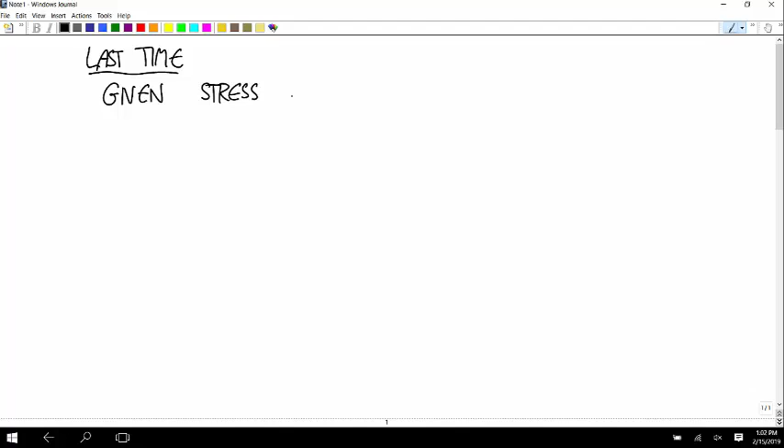Okay, so last time, here's what we talked about. Given a stress tensor, the eigenvalues of sigma are the three principal stresses.

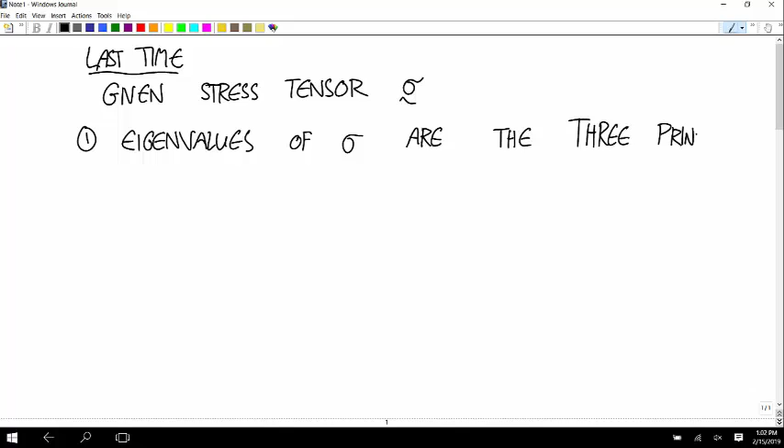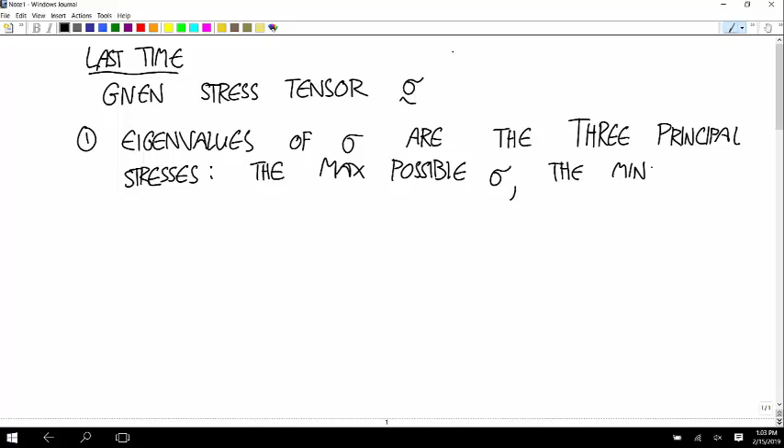That's the maximum possible normal stress, the minimum possible normal stress. And when I say possible, what am I talking about? This is all sort of confusing. It takes a while to wrap your head around it all, I think. So when I say maximum possible, minimum possible, what am I talking about?

I'm talking about at that single point, you can rotate the coordinate system all these different ways, and some coordinate systems would give you big values, some would give you small values, but you'd never find a coordinate system that gave you a more positive value than one of them, and you'd never find one that gave you a more negative value than the other one. So that's what I mean by possible. You can look forever at that point with all these different coordinate systems, and you'll never beat those. And then there's one in between.

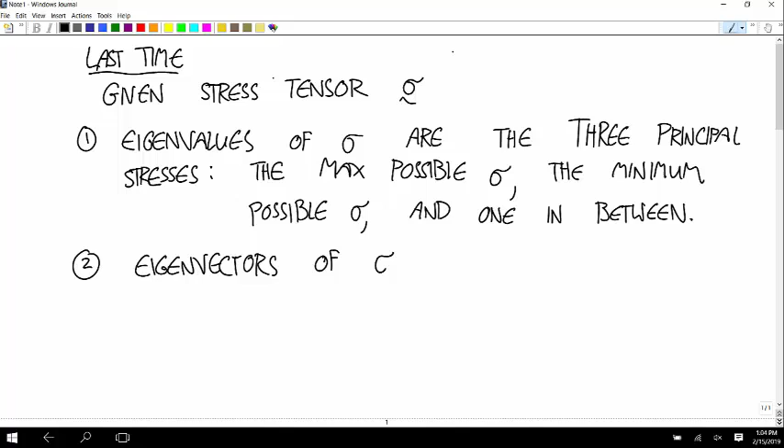The eigenvectors, it takes a little fiddling to get them, but they give you directions of the coordinate axes in the principal coordinate system. So these are the axes of the principal coordinate system.

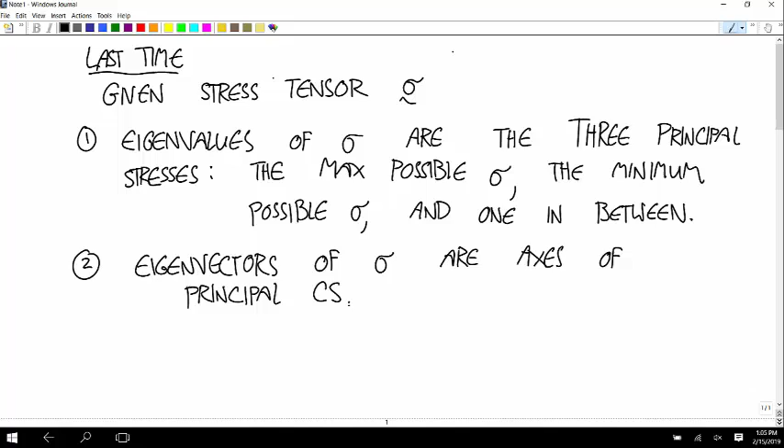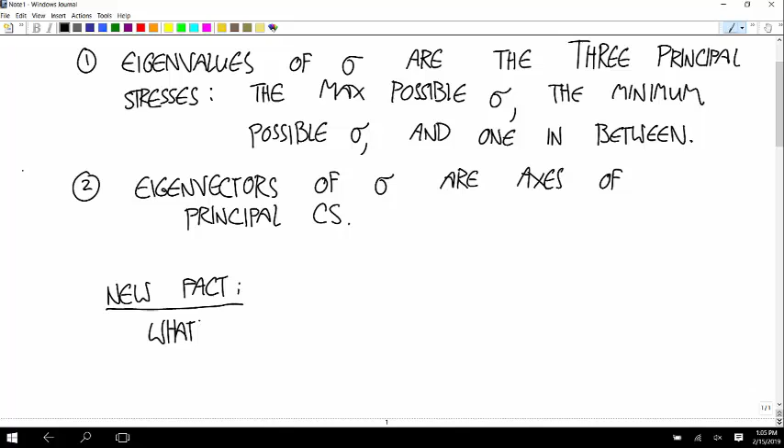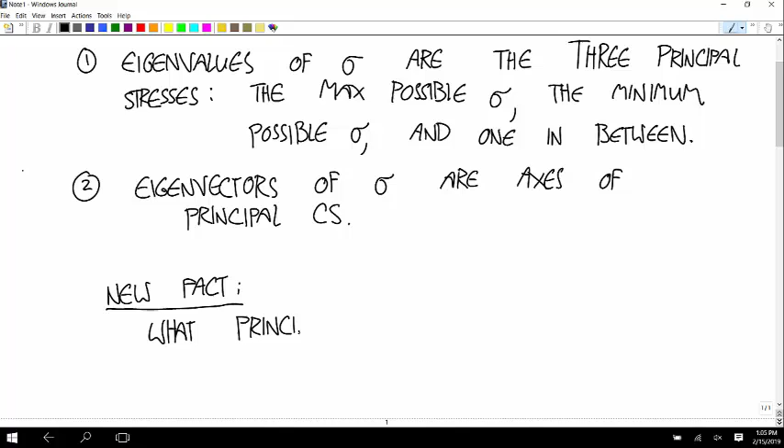And now here's the new thing. It turns out that it's not really the maximum and minimum normal stresses that we're looking for most of the time. What we really want, what the eigenvalues or the principal stresses are most useful for,

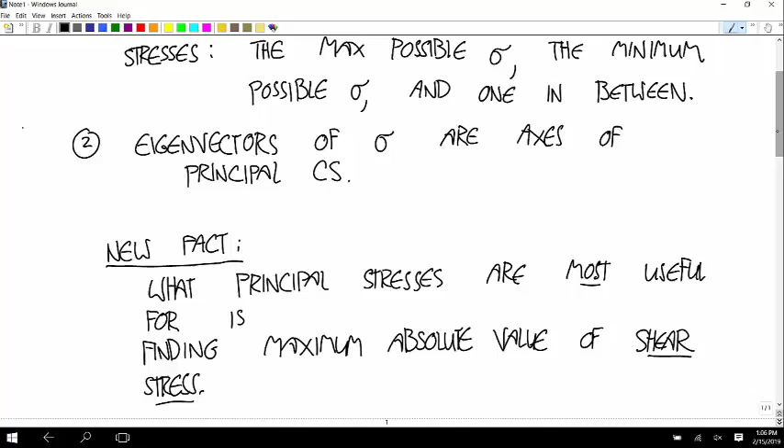is finding the maximum absolute value of the shear stress. So you take the eigenvalues, they give you these maximum and minimum normal stresses, but that's not really what we're looking for most of the time, especially with brittle materials. The more brittle the material, the more important this is. What we're looking for is the maximum absolute value of shear stress.

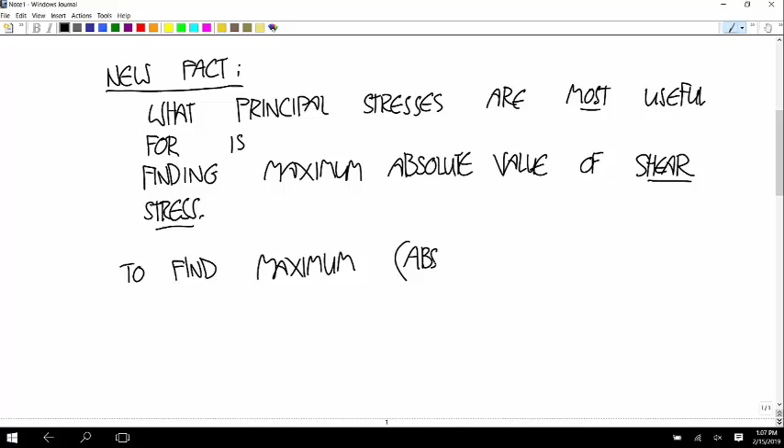Again, at that point, you can rotate the coordinate system all these different ways. And when you find a coordinate system with the maximum absolute value of shear stress, that maximum absolute value of shear stress is a good predictor of damage or failure. Okay, so how do you do that? To find the maximum, people just call it the maximum shear stress, but remember we're talking about absolute value. With shear stress, there's not really any fundamental difference between positive and negative.

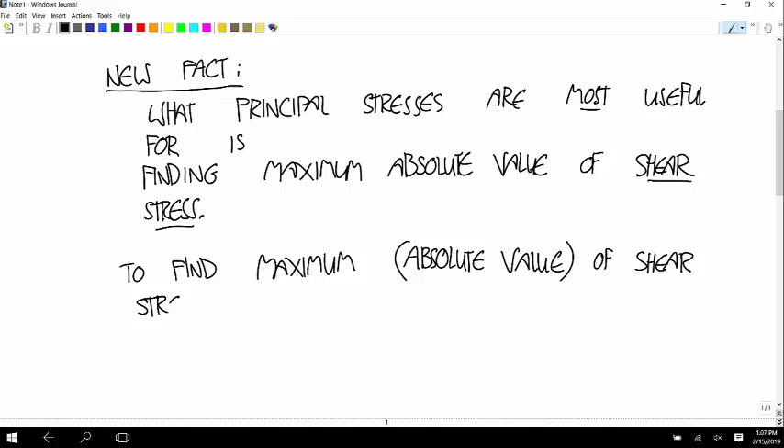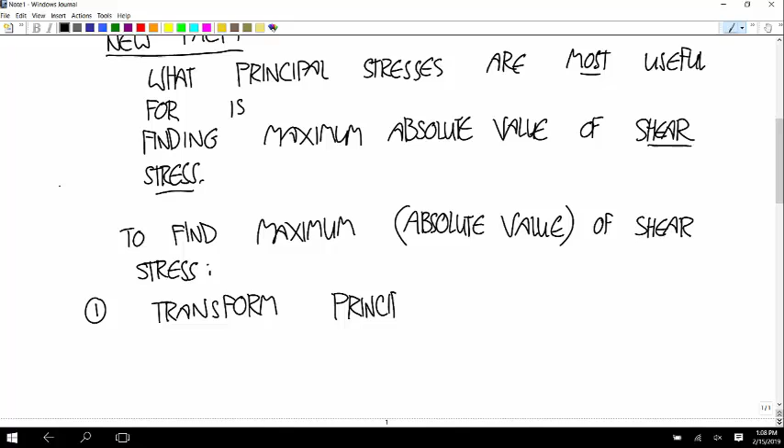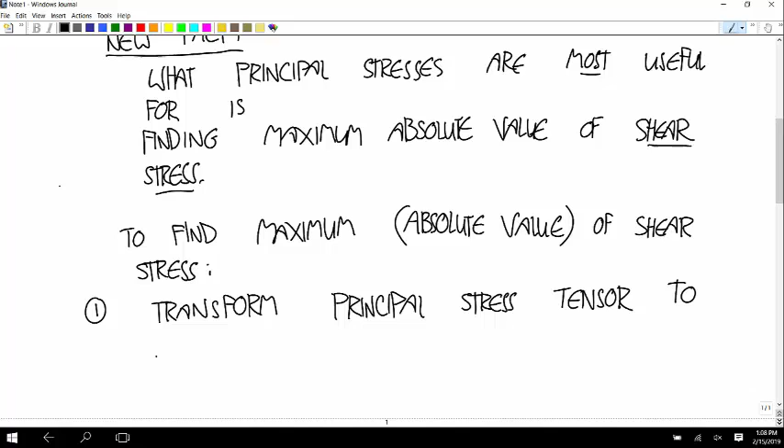So one thing you can do is a rotation: transform the principal stress tensor to a coordinate system that's rotated 45 degrees about the axis of the middle eigenvalue. Okay, that sounds sort of wordy, but the idea is simple.

When you have your principal stress tensor, you have three values on the diagonal. The x diagonal position is the x normal stress. The y diagonal position is the y normal stress, and the z normal stress is the third one. Whichever one of those three is the middle value of stress, rotate about that corresponding axis. So if your middle one is in the x position, rotate 45 degrees about the x-axis. And you get this new stress tensor that has a maximum shear stress when you take its absolute value. That's the hard way to do it. It's not that hard, but there's an easier way.

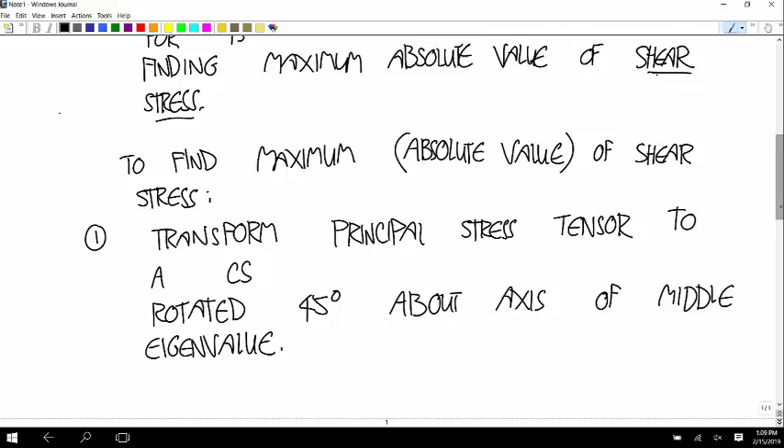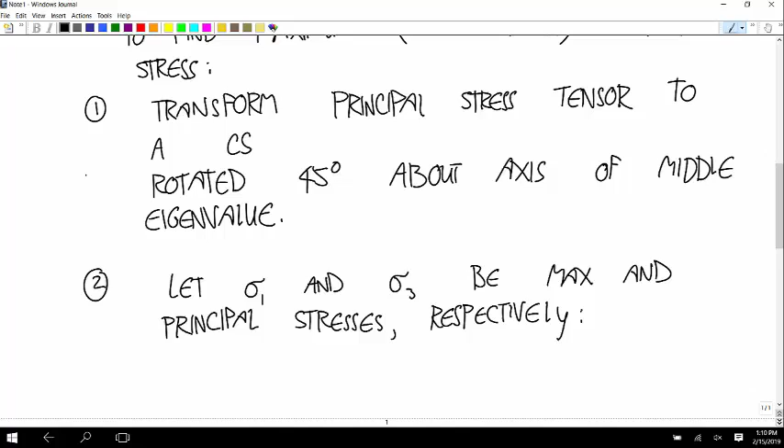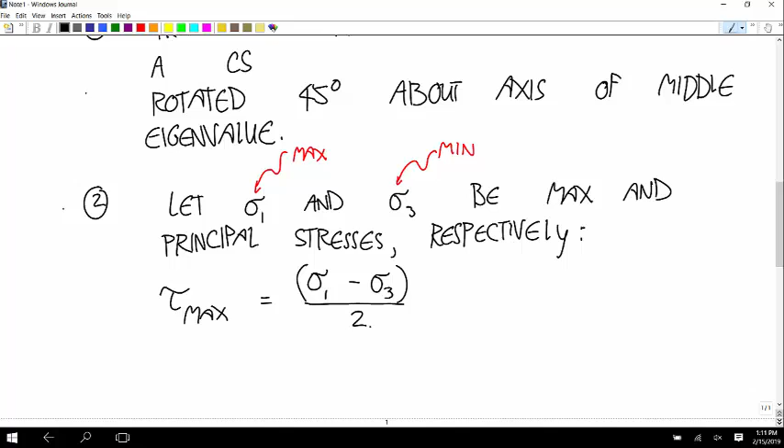The benefit of that is it'll give you the whole stress tensor. If all you want is that maximum shear stress, then let sigma 1 and sigma 3 be the max and min principal stresses, respectively. So this one's the most positive, this one's the least positive or most negative. Then the maximum shear stress is the maximum principal stress minus the minimum principal stress, divided by 2. So if all you want is that maximum shear stress value, you can just use that simple formula and calculate it, and you don't have to worry about any of the other elements in that matrix.

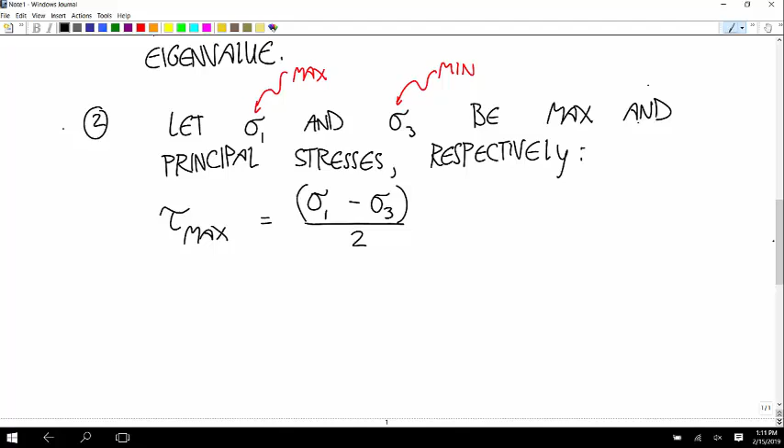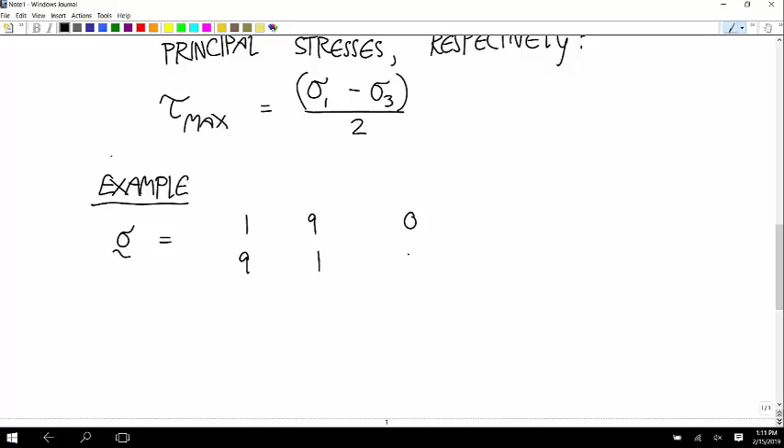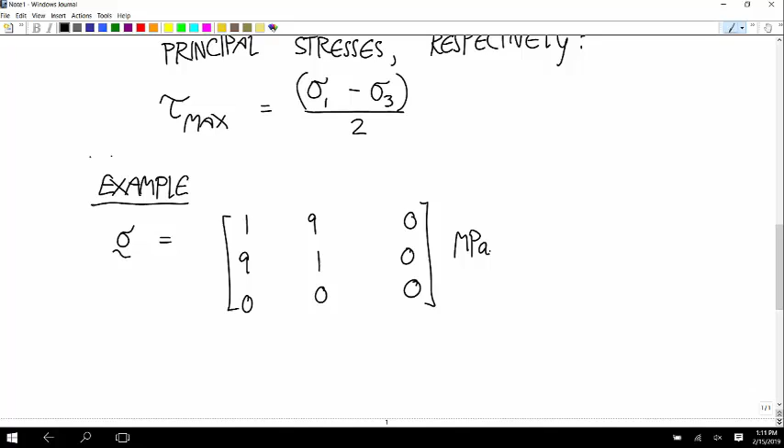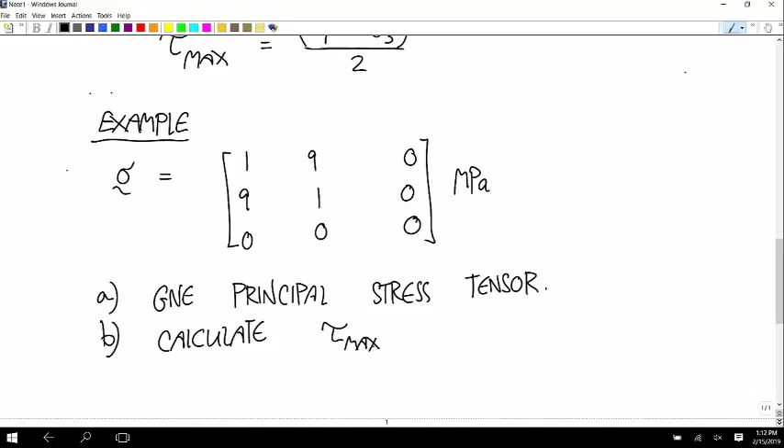Okay, let's do an example. Let's say the stress tensor is [1 9 0; 9 1 0; 0 0 0] megapascals. A: give the principal stress tensor. B: calculate the maximum shear stress, just using that formula. And C: last, we'll do that coordinate system transformation.

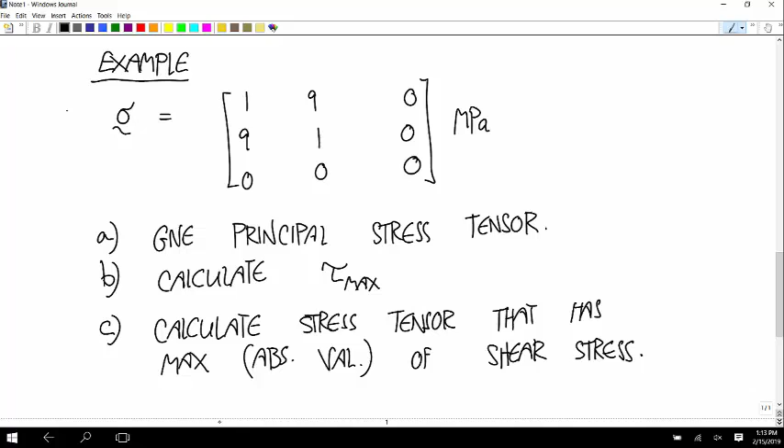We'll calculate a stress tensor that has the maximum absolute value of shear stress. And B and C have to agree. When we take the biggest absolute value out of this stress tensor, it has to match our answer for B that we get from that formula. Or else I'm a liar. Or we made a mistake.

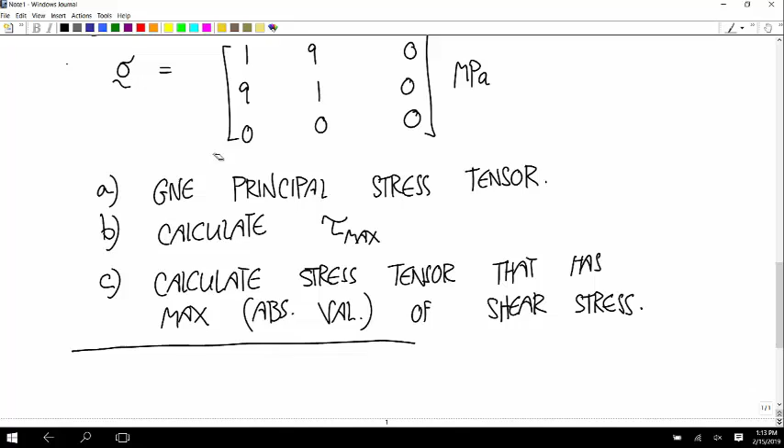Okay, so the easiest way to calculate the principal stresses is just to plug it into a calculator. But I have this set up to just turn into a quadratic. So let's go through the calculation. For A, just make your calculator do it.

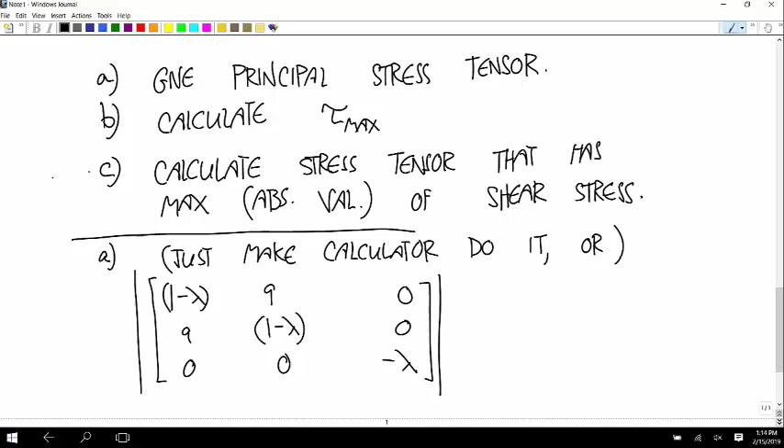So now we're going to take the matrix with rows: 1 minus lambda, 9, 0; then 9, 1 minus lambda, 0; then 0, 0, minus lambda. And we want to set that determinant equal to 0. So we have 1 minus lambda times the quantity, 1 minus lambda times negative lambda, minus 0. Then we have 9 times the quantity, negative 9 lambda minus 0. And then we have plus 0 is equal to 0.

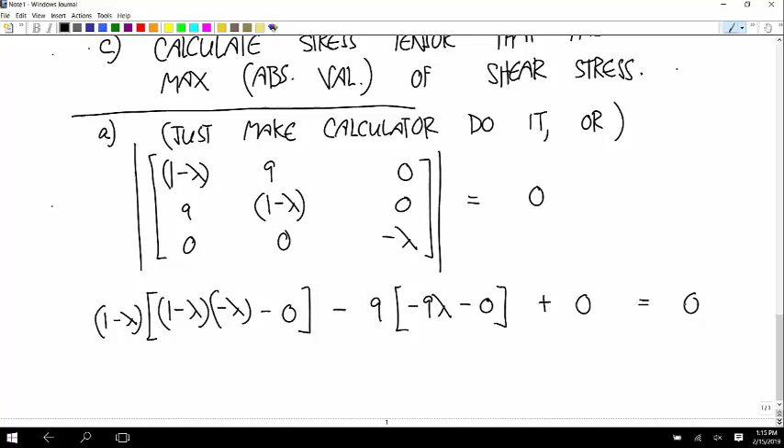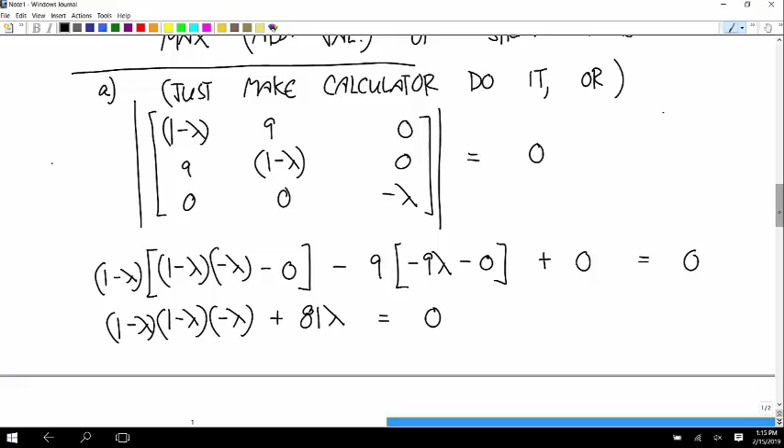And if we multiply this out, we have (1 minus lambda) times (1 minus lambda) times negative lambda, plus 81 lambda is equal to 0. So let's pull a lambda out of everything, and let's switch the signs. So we have lambda times (1 minus lambda) times (1 minus lambda) minus 81 is equal to 0.

And you can already see, since we've factored out this lambda, one of the roots is lambda equal to 0. I multiplied both sides by negative 1. Okay, so lambda equals 0 is a root. So now we just need the other two.

And 1 minus 2 lambda plus lambda squared minus 81 is equal to 0. So we have lambda squared minus 2 lambda minus 80 is equal to 0. And now you can just use whatever quadratic formula solver you have. This factors into nice numbers, but just use the quadratic formula. It factors into (lambda minus 10)(lambda plus 8), I believe. Lambda is equal to positive 10, negative 8.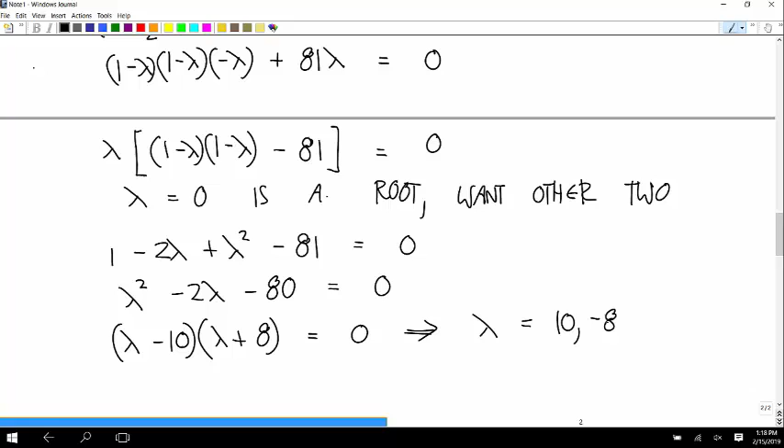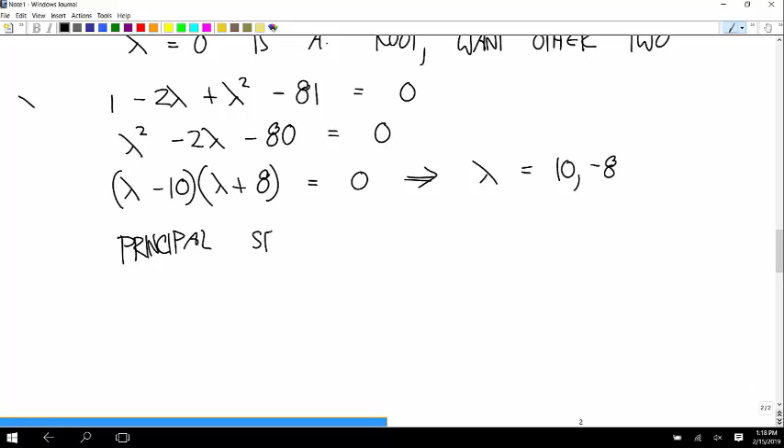Okay, so the principal stresses. I'm going to do them in order from biggest to littlest. So we have positive 10, 0, and negative 8. These are all megapascals. In this case, our maximum was positive and our minimum was negative, but that doesn't have to be the case. You can have 10, 4, and 2, or you can have negative 2, negative 6, negative 20, or whatever.

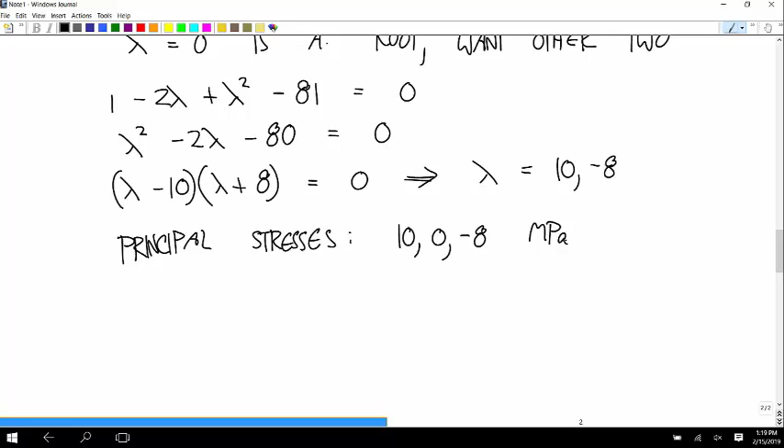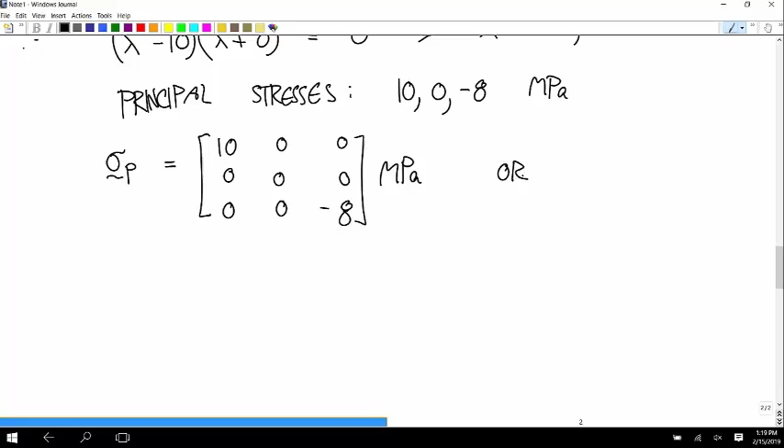And so what's the principal stress tensor? Well, there's a bunch of them. You could do 10, 0, negative 8. By a bunch, I guess there's exactly 3. You can move those around anywhere along the diagonal. Actually, permutations, so there's 6. Yeah, 0, 10, negative 8. Let's not do them all. Any of those are fine. You just need to have those 3 principal stresses on the diagonal and zeros everywhere else.

And what those correspond to is, if we're saying our 10 is on the x-axis, our 0 is on the y-axis, or our 10 is on the x face, y face, z face. This one is just saying the y-axis here is the x-axis that we had here. So it's just 90-degree rotations of these things that give different permutations. Okay, that's the meaning of those. I'm going to use this one. It's not any better or anything, but I'm just going to use that one.

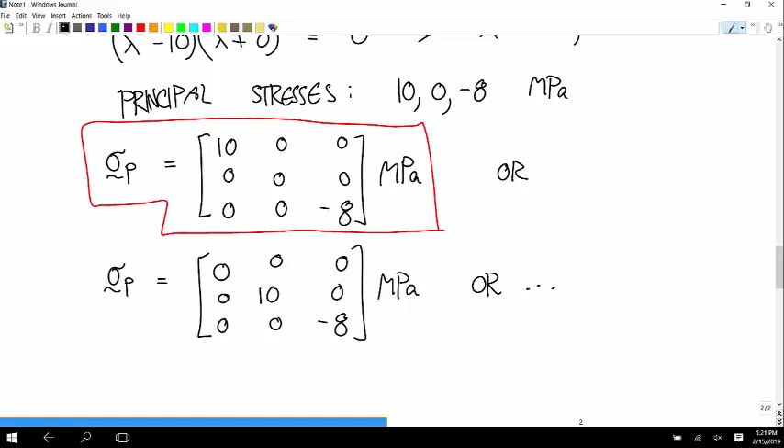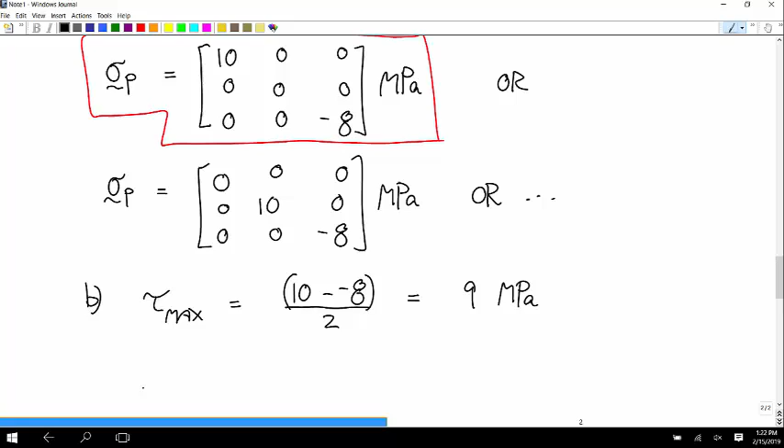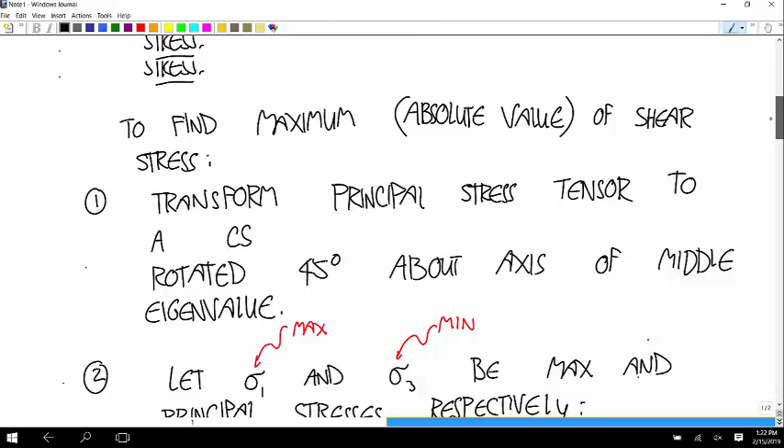All right, so next we want to calculate the maximum shear stress. That's equal to the maximum principal stress minus the minimum principal stress, divided by 2. And so that's equal to 9 megapascals. If you rotate the coordinate system in 45-degree versions, you can get nines and negative nines, but you can't get anything with a bigger absolute value as a shear stress. You can get it as a normal stress maybe, but not as a shear stress. By the way, look at the original stress tensor for this problem: we had 9 in these shear stress elements, which means that this is a version of the stress tensor with the maximum shear stress, the one that we started with.

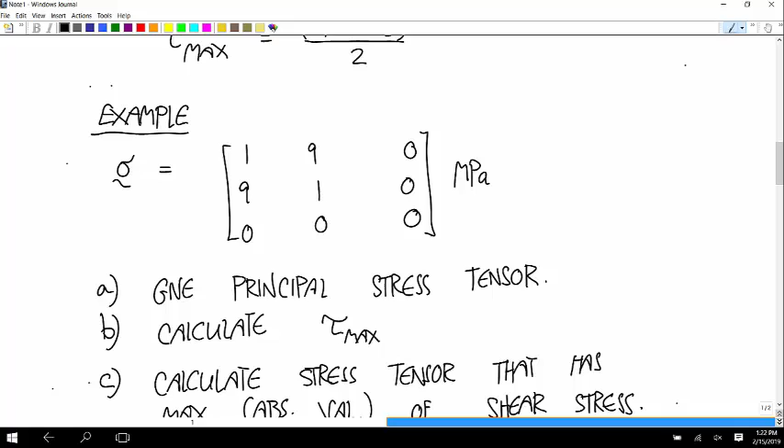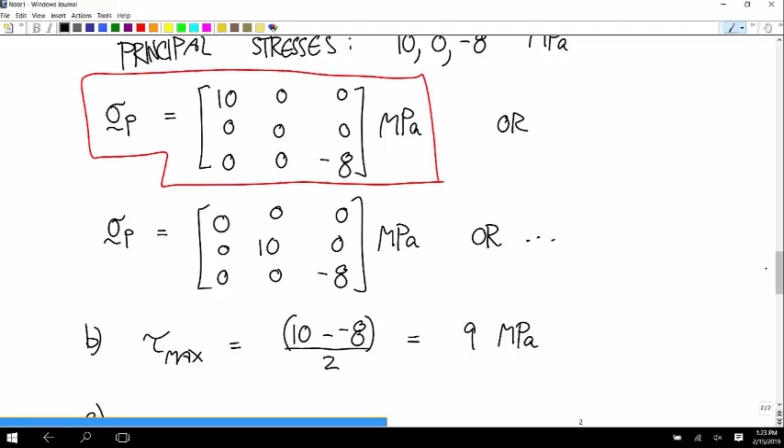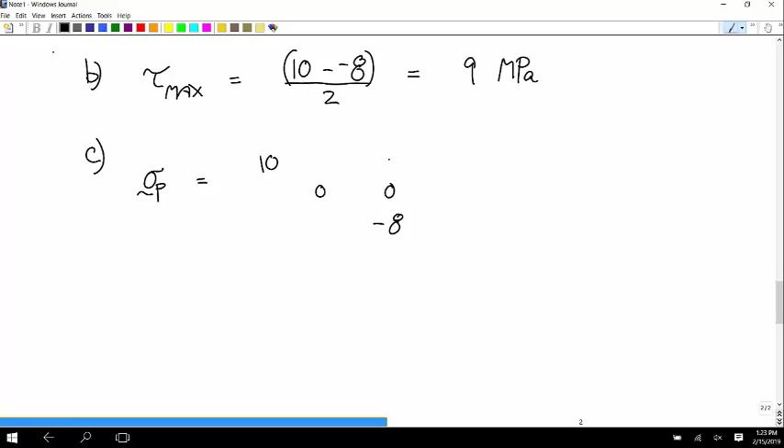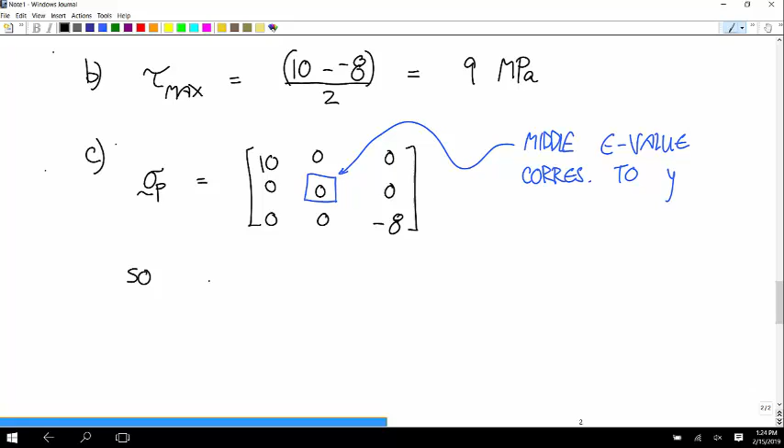Okay, so now say we want the stress tensor that corresponds to that maximum shear stress. How are we going to get that? Well, in this one we're choosing here, our principal stress tensor is 10, 0, negative 8, zeros everywhere else. What axis corresponds to our middle eigenvalue? Y, yep. The middle eigenvalue corresponds to Y. So we're going to rotate the coordinate system 45 degrees about the Y axis. You could also rotate negative 45 degrees. It would work out just as well.

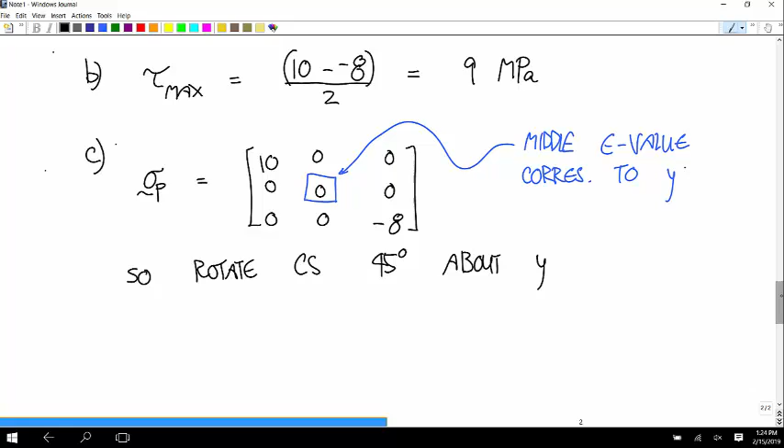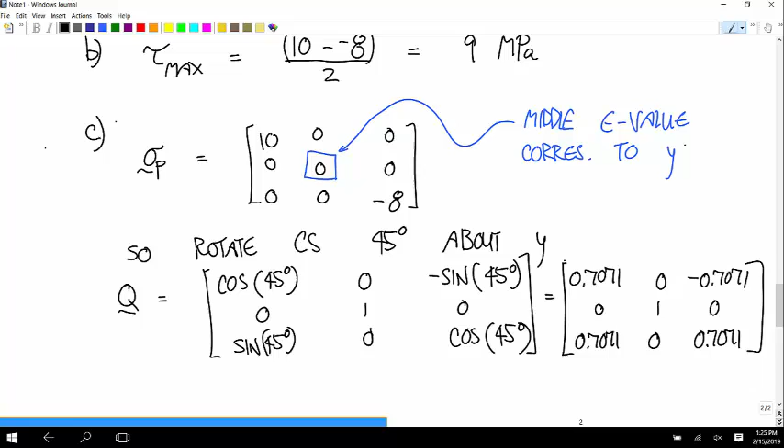So the rotation matrix is cosine of 45, 0, negative sine of 45; 0, 1, 0; sine of 45, 0, cosine of 45. That's 0.7071, 0, negative 0.7071; 0, 1, 0; 0.7071, 0, 0.7071. And so now the stress tensor with a max shear stress is equal to that rotation matrix, 0.7071, 0, negative 0.7071; 0, 1, 0; 0.7071, 0, 0.7071, multiplied by the stress tensor with diagonals of 10, 0, negative 8.

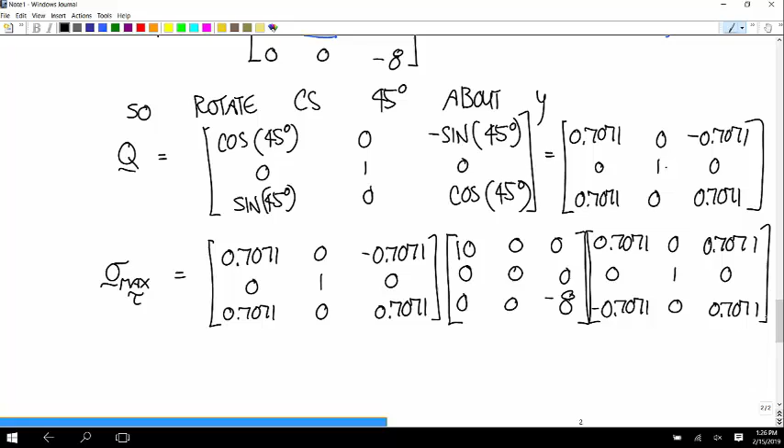Multiplied by Q transpose, 0.7071, 0, 0.7071, 0, 1, 0, negative 0.7071, 0, 0.7071. Anybody doing this? Okay. 1, 0, 9, 0, 0, 0, 9, 0, 1.

I mean, the fact that we came out with a 9 in a shear stress position makes me think. So we came out with this stress tensor that wasn't, so like I said, we happened to start with one that had a maximum shear. We didn't get that one back. We got some 90-degree rotated version of that one. But we got the same answer for what's the maximum absolute value of shear stress and a tensor that corresponds to it. Anybody have any questions about any of those calculations?

So how did I get this? What did I do to get this? Started with some matrix, and it turned out that its eigenvalues were positive 10 and negative 8 and 0. Nice, simple numbers. How would you go about making something like that happen? Like me, when I was making the problem. I think answering this question helps square away how all these things relate to each other.

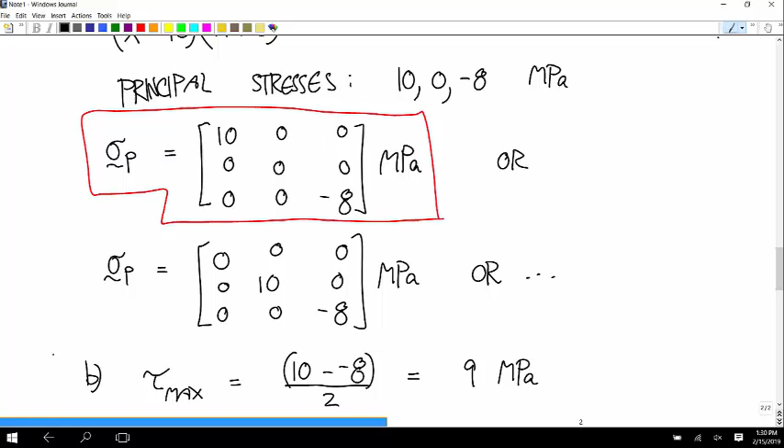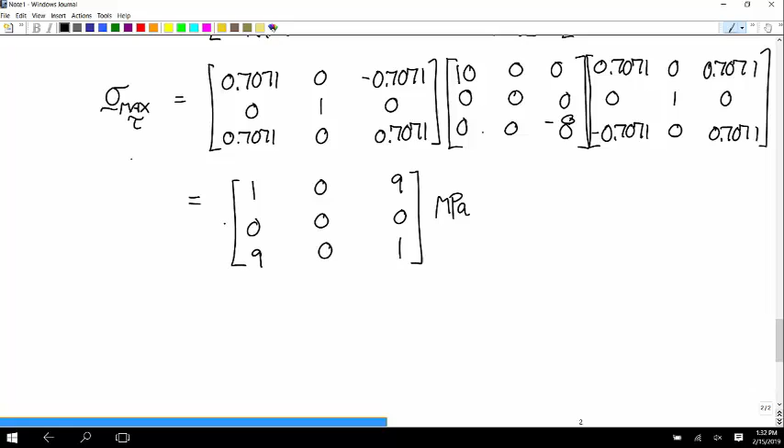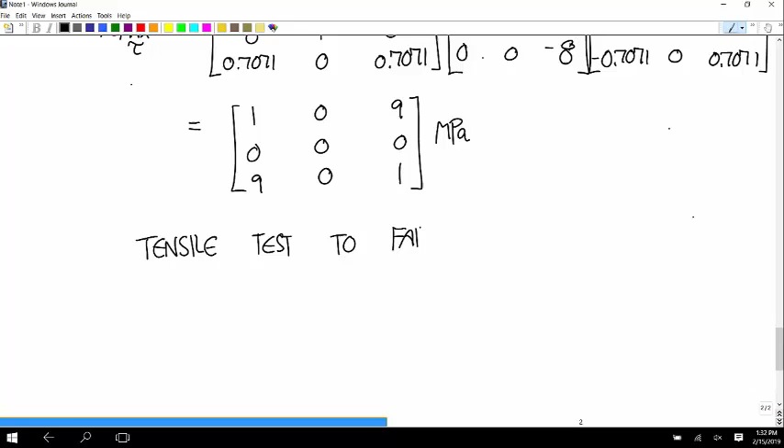Okay, so now we are almost done with everything we need to know about the relationships between stresses and strains and manipulating stress tensors. There's one more thing I want to talk about, and that is the tensile test, if you do it all the way to failure. So we've talked about using a tensile test to calculate Young's modulus and Poisson's ratio. But Poisson's ratio and Young's modulus come from the linear elastic range of the material. You don't have to stretch this material very far, and it doesn't do any good to stretch it very far. You just pull on it a little bit and calculate those values.

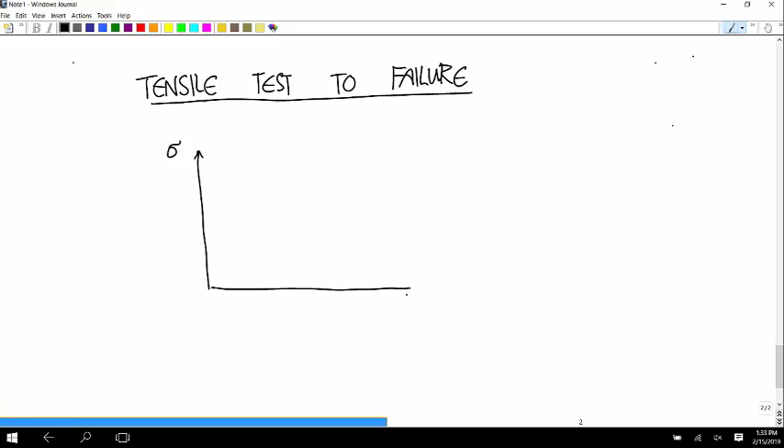But usually when you do a tensile test of a material, you continue pulling on it until you start to get permanent deformation, and then you get necking, it's called, where the middle starts to thin out, and then it really starts stretching, and finally it breaks apart. It's really loud, by the way. So let's think about what happens on a stress versus strain graph. So this is the stress, and this is the strain. And this is what happens for most engineering materials, and it happens for metals.

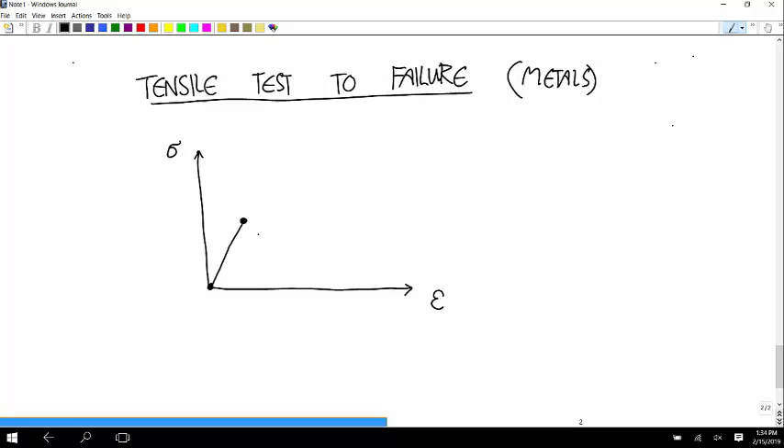When you first start pulling on it, well, before you start pulling on it, what's the stress? 0. What's the strain? 0. So we know that it starts here. And then you start pulling on it and you get something like that. Depending on what your units are, it's steeper or less steep, until you get to some point, A. And this is the region that this class deals with. This is the linear elastic region.

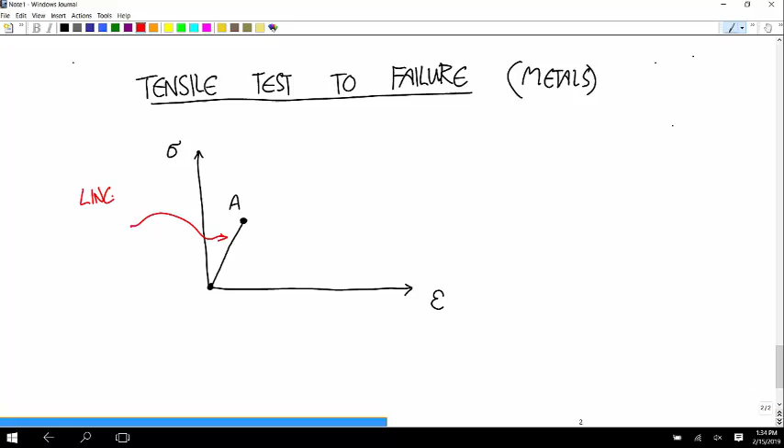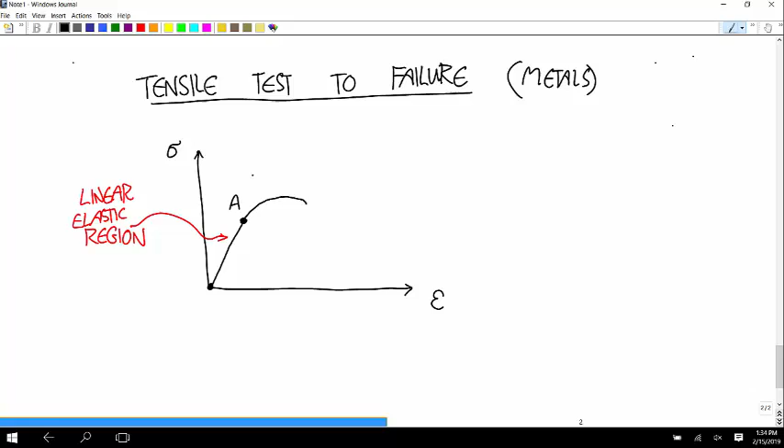And then after it reaches this point, you start to get nonlinear behavior around the same time you start to get permanent deformation. They don't always exactly line up, but it's close. And you start to get something like this. And that can extend farther, or it can be shorter. But this is nonlinear. Well, you can see it's nonlinear. It stops being a line. And it's plastic deformation, permanent deformation.

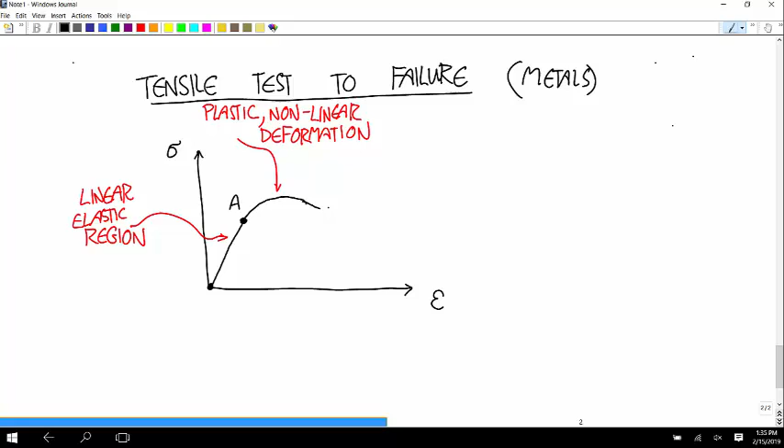And then it starts to have this negative slope, which means even if you reduce the force a little bit, it would still be stretching. It's basically getting a lot weaker until you get to some point B, at which point it starts to get stiffer again, and then eventually somewhere up here it breaks, and now it's in 2 pieces. So this region is what this class is about.

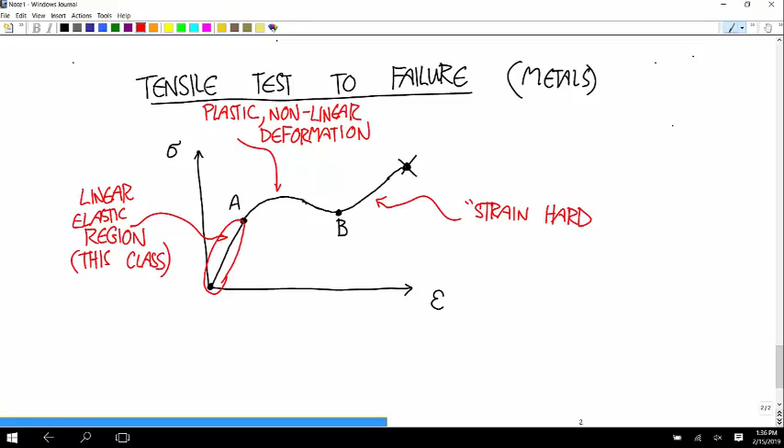There's a lot of stuff that goes on with this material after anything that this class deals with. After A is the plastic deformation, then you get to this point B, and after the point B, that thing where it starts to get stiffer again, that's sort of weird. You wouldn't really think necessarily that that would happen, but this is called strain hardening. And also, by the way, right around here, you start to get a difference in these values depending on how you calculate the stress.

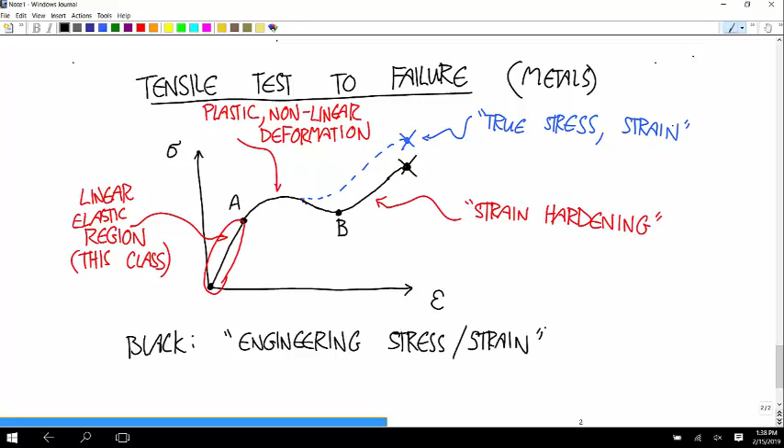This is called true stress, true strain. The black line is called the engineering stress and strain. And the difference between these two, this is where necking starts to happen. So the blue and black lines separate when necking begins.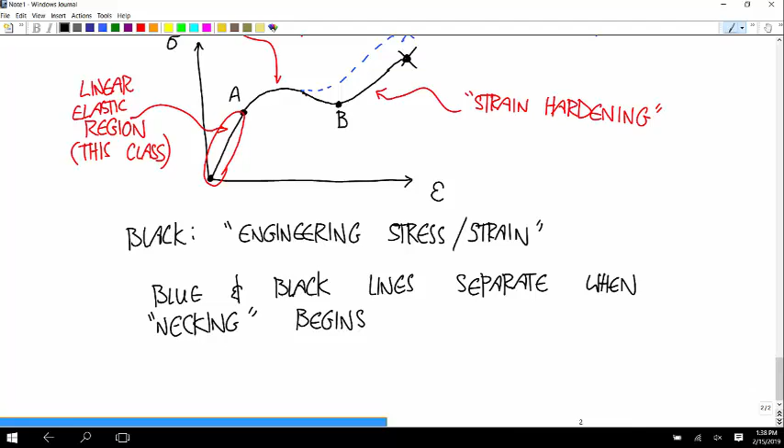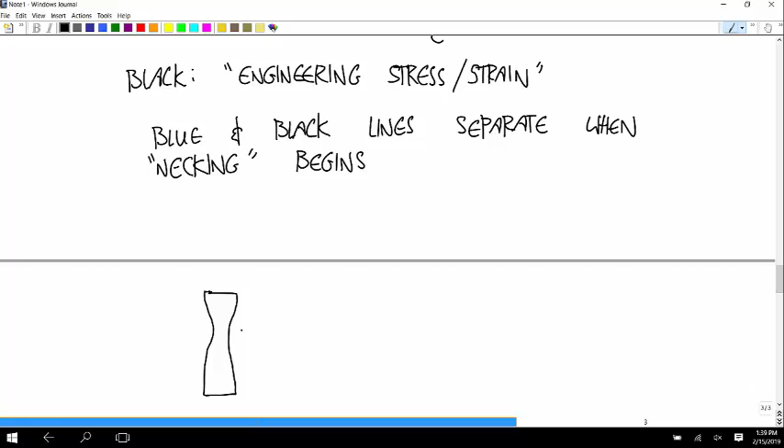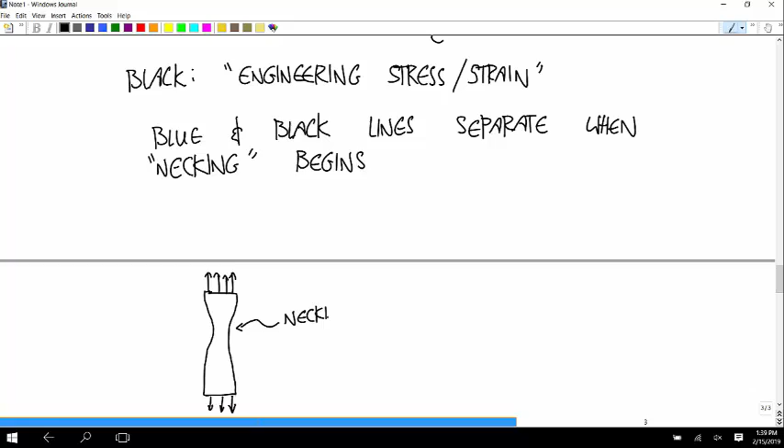I'm just going to draw a picture of necking. So this sample starts to thin out in the middle as you apply these forces. And so to calculate the true stress and the true strain, you're actually using the current measurement of the cross-sectional area to do your calculation of stress and strain. Okay.

And so for the engineering strain, you're just using the original cross-sectional area. And so if you're dividing by a smaller cross-sectional area, the stress values are going to get bigger. And that's why the true stress, when it starts to neck, starts to get much bigger than the engineering stress. Okay.

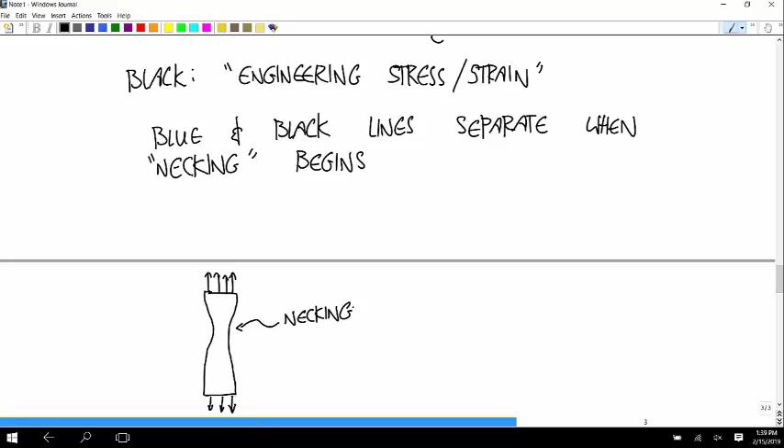So anyways, that's just some terminology that sometimes comes up. But if you're running out of brain space and you only have space to remember one thing about all of this tensile test stuff, it's that this small region on the left is the only thing that this class is capable of dealing with.

When they start to separate, the true will always be bigger at every point because you're dividing that stress. Remember, to calculate the stress, you're taking the force divided by the cross-sectional area. And so if you're dividing by a smaller cross-sectional area, it just increases the value. But the shape stays the same.

Oh, no, not that I know of. I think you just do it because they're more sophisticated than what we're doing in this class. There are ways to predict when something's going to fail. And so you can use this to figure out how to calculate when something is going to fail. There are a lot of cases where you don't mind plastic deformation.

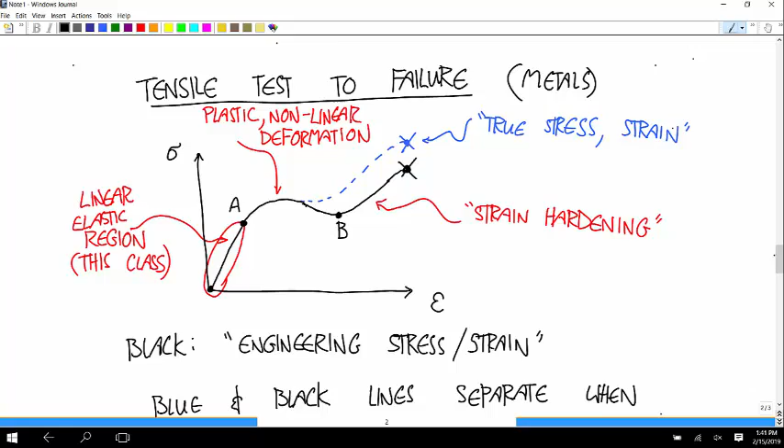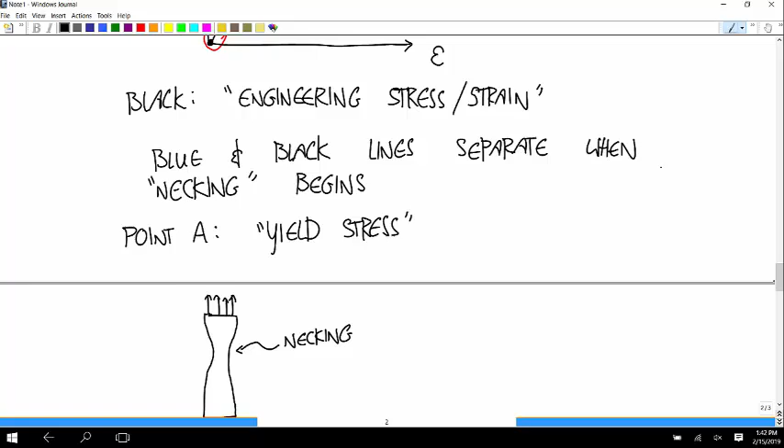And so for us, all we can do is, and that point A actually reminds me, is an important point. A is called the yield stress. And that says when permanent deformation is going to start.

And so using the methods in this class, we can calculate when permanent deformation is going to start. But in most engineering applications, you don't really care when permanent deformation starts. You're fine with permanent deformation starting. You just want to make sure it doesn't break. And so if you can figure out a way to calculate when that's going to happen, or at least when this crazy stuff is going to start to happen here, then that's a little more useful.

Yes, it does. I don't remember exactly how, but yes, it does. Any other questions? It depends on the application, I think. In some cases, you don't want any permanent deformation, and so you want to stop before that. In other cases, you don't care whether it bends, as long as it stays strong. By the way, what mathematical thing about this graph tells us Young's modulus? Yes, good. The slope in this region is Young's modulus.

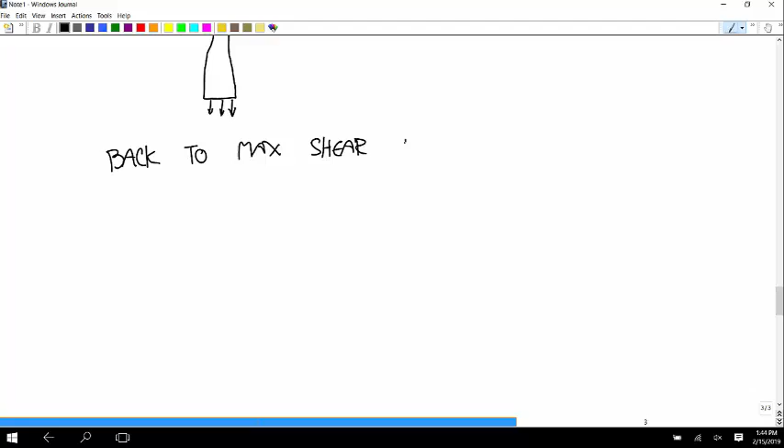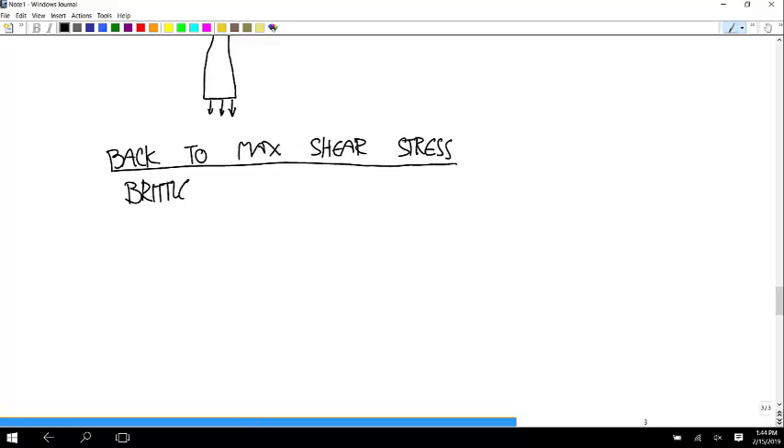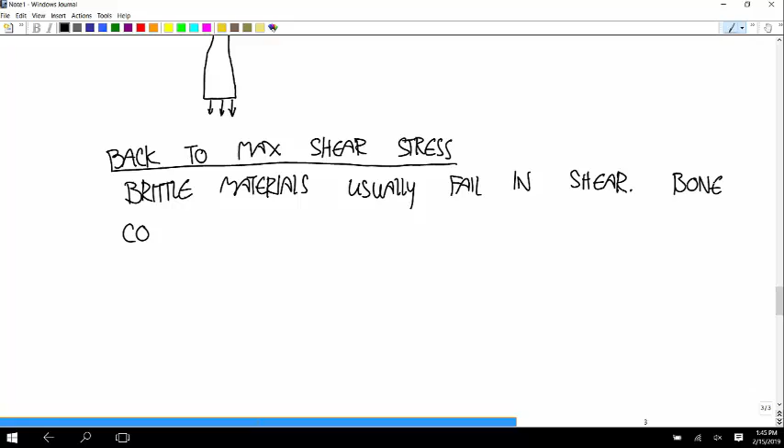Okay, there's one more thing I wanted to say. This is back to the max shear stress. Brittle materials usually fail in shear. And one application of this that really shows how all these things fit together is compression fractures, bone compression fractures. It's also true of stakes of wood or any kind of brittle material that fails by compressing it.

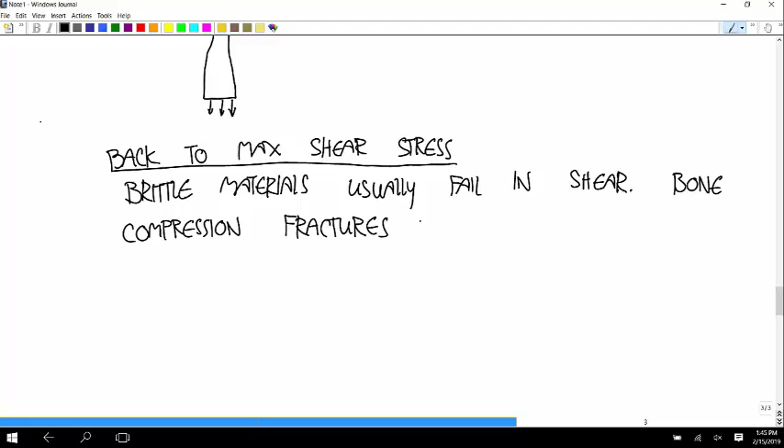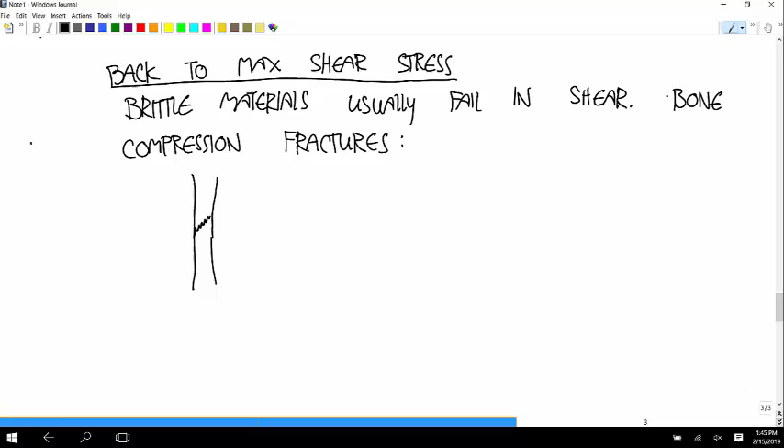So in an X-ray, if you're looking at a femur that's been in a car accident and fails due to compression, that's pretty common, like when you hit your feet on the front, under the steering wheel, and get a compression fracture. What it looks like is this. And the reason it looks like that is that the forces are being applied in this direction. And so the principal stress tensor has one axis this way, one this way, and one this way. Okay, that's the principal coordinate system.

And therefore, the coordinate system where shear stress is maximum is oriented at 45 degrees from that. And so the breaks happen at that angle because bones are weaker when subjected to shear stress than they are when subjected to compression or tensile stress. And so they're most susceptible to breaking in that direction where the maximum shear stress occurs. Pretty interesting.